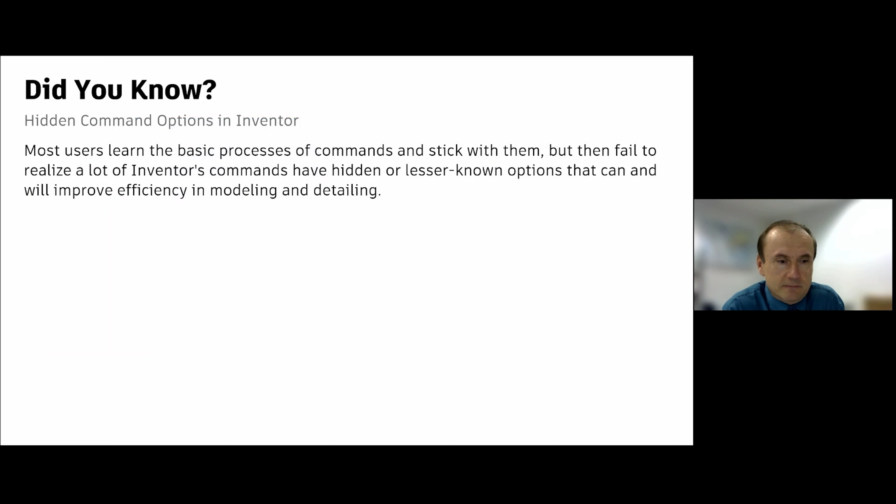So most users learn the basic processes of commands and stick with them. But then they fail to realize that a lot of Inventor's commands have hidden or lesser known options that can and will improve your efficiency in modeling and detailing. While this may seem very basic, and this is an Inventor 101 type class, we hope you'll come away learning something new from this class as well.

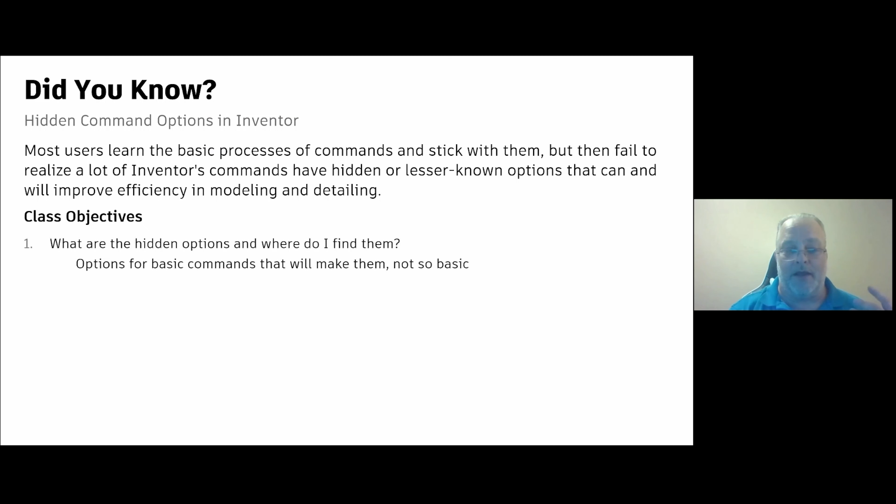So our class objectives today: number one, what are hidden options and where do I find them? Options for basic commands that'll make them, well, not so basic. How to crop a view other than the default rectangular crop. How to put in ordinate dimensions on a crop view or detail view. The user interface, my home options, assembly options, and analyze interference options.

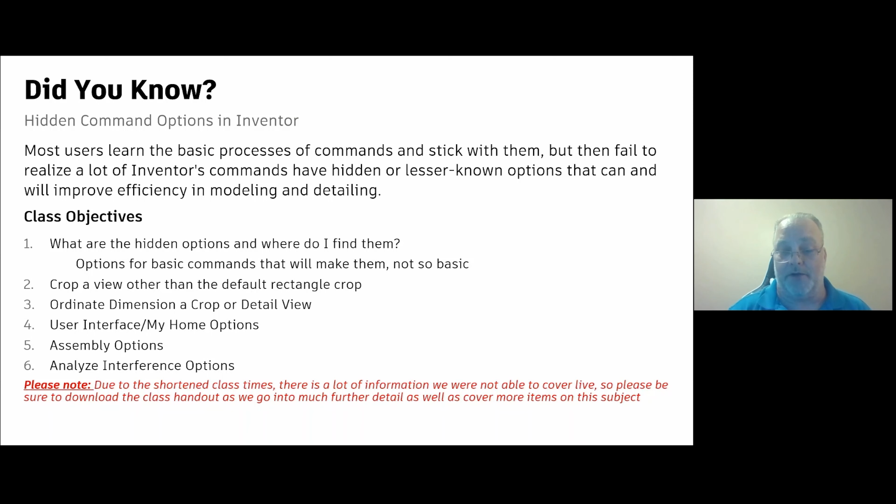So objective one, what are hidden options and where do I find them? Prior to the 2021 release, those on older releases of Inventor, these hidden options are typically found on secondary and tertiary tabs within the pop-up dialog menu. For example, the extrude command looks like this. You got the main menu, and then you got the more tab on there. You'll find some commands that have at least 3 tabs as well.

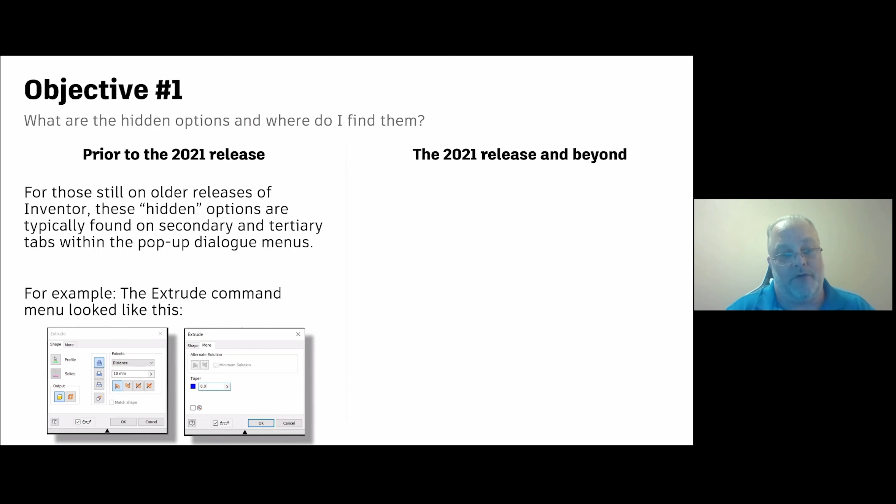Now for the 2021 release and beyond, the extrude command now looks like this. Notice all your options are now up front and visible. There's no more tabs that you have to click, or nothing's hidden. Everything's right there and ready for you to use.

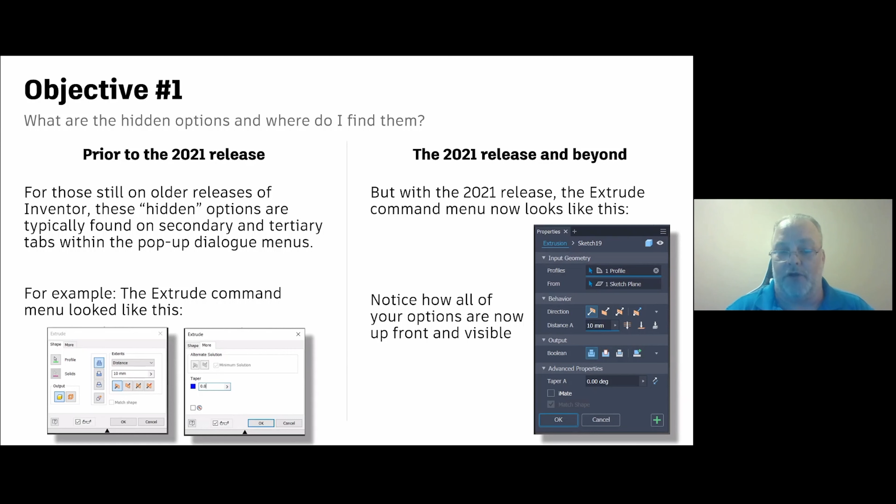So sure, some of you might say, so what? Good point, and I'm glad you think that way. But while these may seem rather obvious, it has been my experience that while users may know the options are there, they still don't tend to use them, either due to not being familiar with them, or knowing what they actually do, or even how to use the options, as well as what I call the comfort factor. Familiarity is comfort - people like to be comfortable, and they tend to stick with what they know. By moving these command options all into the main menu, users should start using these options when needed, as opposed to doing an extra task or a separate command. So the fact is, a lot of users never bother to look beyond that main tab.

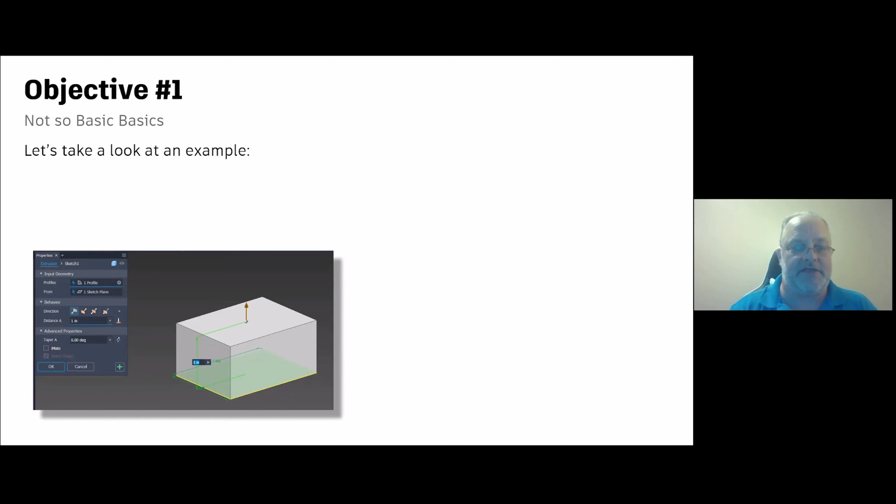So let's look at an example here. So you got the basic extrude command. Now, let's say you needed a draft, okay? You could use the taper option, and you can generate that draft to that operation, avoiding having to add another

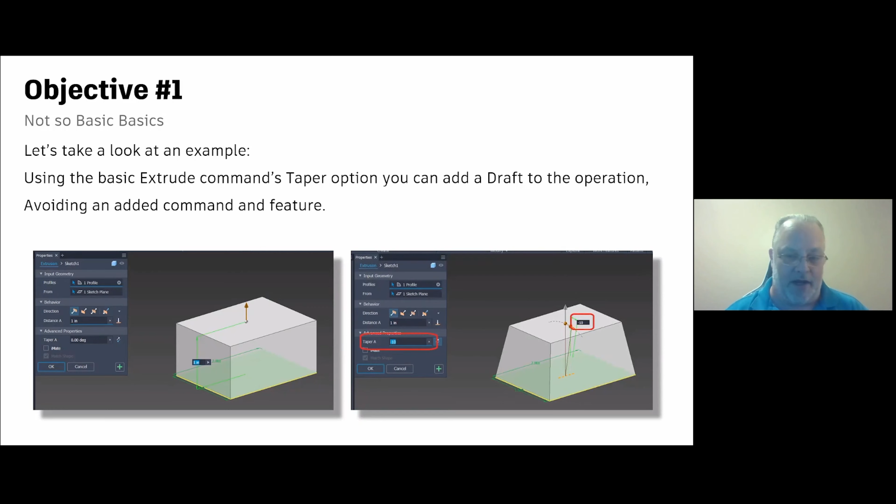command and feature. Now, again, you know your product better than anybody else does, so this may not apply to you in that certain instance, but then again, it could. So knowing the option is there, it's up to you to use it and utilize it to your advantage. So again, as you can see, you can put that taper on there, and that could act as a draft for that particular feature.

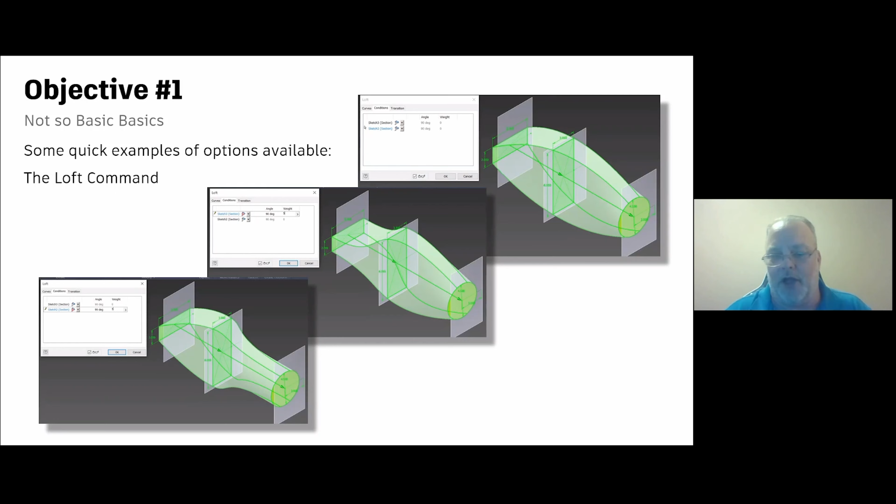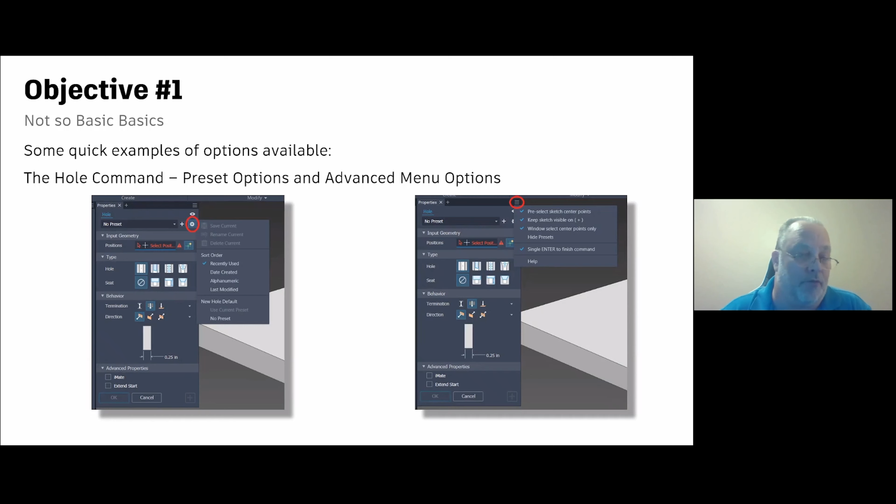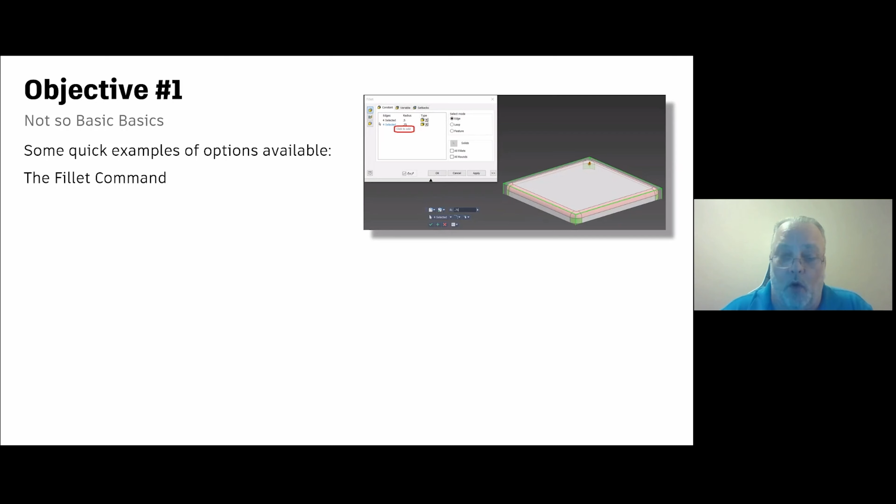The fillet command. Although it's located on the main menu of the fillet command, one of the items that users seem to miss the most is the click to add option, as you see circled here. This allows you to literally insert all required fillets in one command for that entire part.

Okay. The second tab on your fillet is for variable fillets. So it allows you to do just that. One fillet that has variable radiuses, you can put them all into one command. And then the third, you're allowed to adjust the setbacks for each fillet at their intersection.

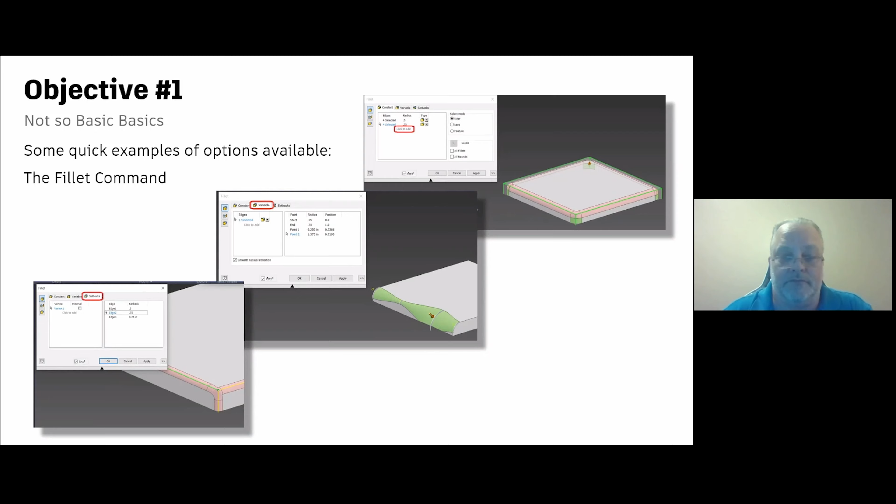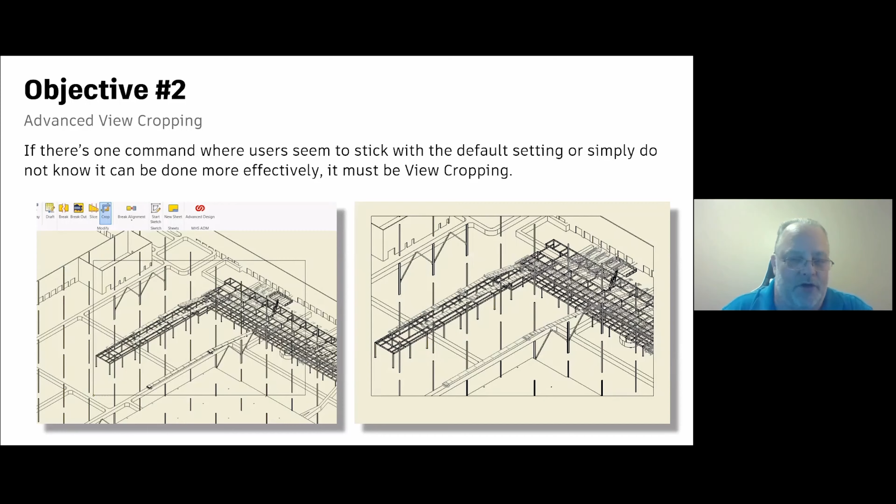Okay, as you can see here, I got an ISO view, and in this first picture, here's your crop window. What if I don't want all this extra info included in here? Okay, unfortunately, using the default, that's all you got to play with. Well, there's a better way of doing it.

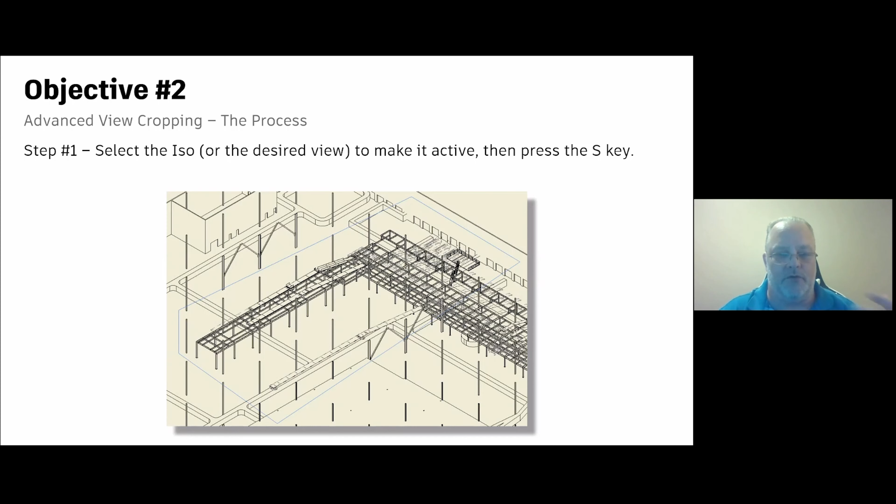So step 1, select the ISO or the desired view, make it active, and then press the S key. That will put you into sketch mode for that view, generating a view-based sketch. Step 2, sketch the desired boundary of the crop, and it needs to be a closed loop, and constrain it to prevent it from shifting during any kind of edits.

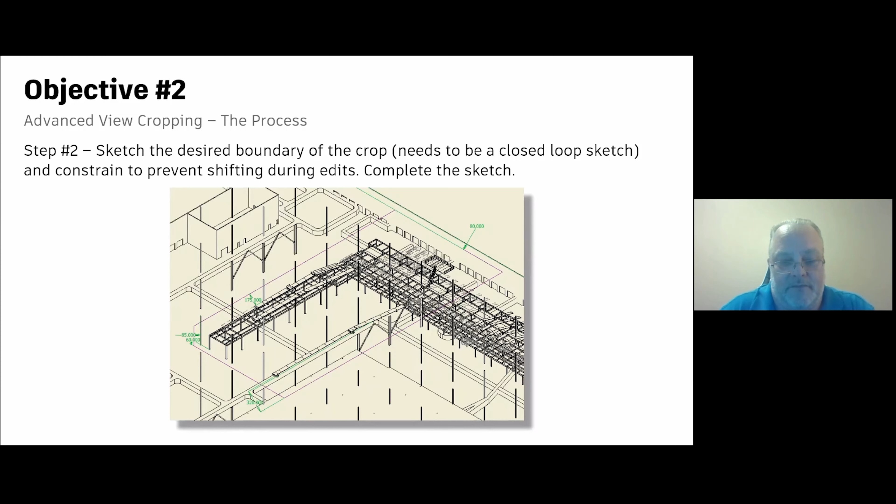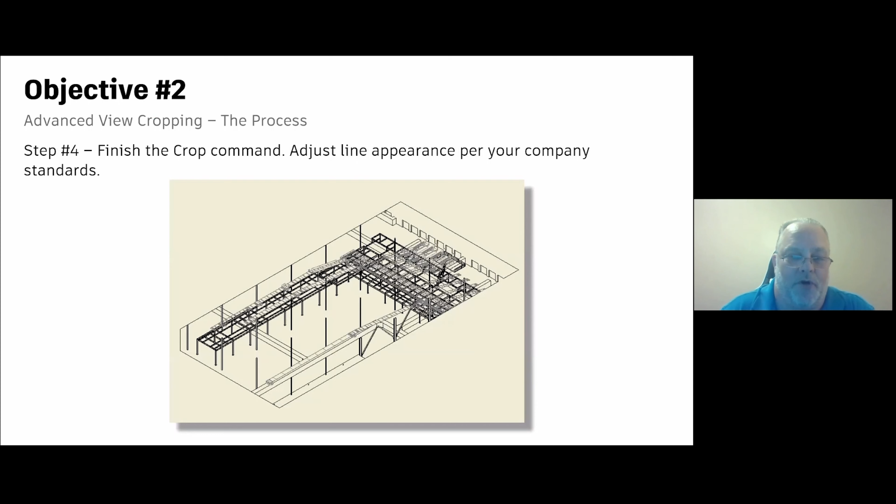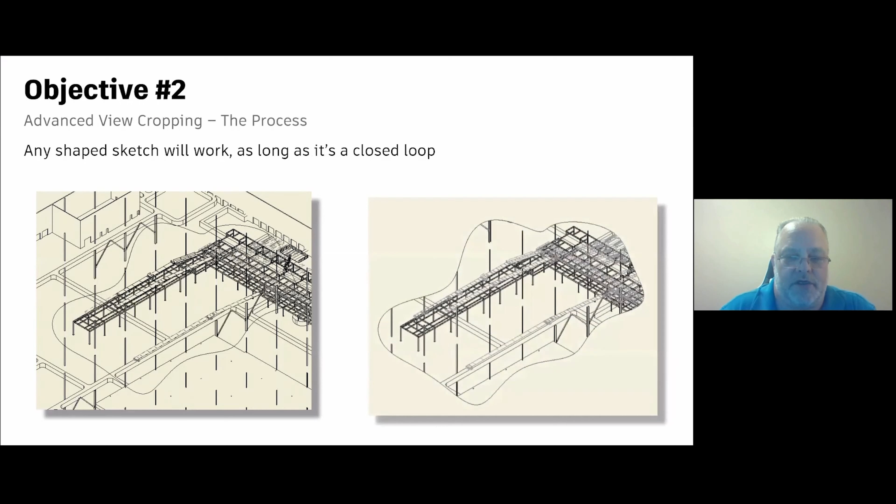This will be shown step by step in the handout. Okay, so this video may go through kind of quick, but we'll definitely have it step by step within the handout. So check that out. So here we have a detailed view we have sectioned off, and we got to dimension this.

So what you want to do is open up the browser until you get to that part, and then right click and select include work features and make visible whatever you're using as your origin. Okay, so here's your origin point. Granted, it's off the drawing in this case.

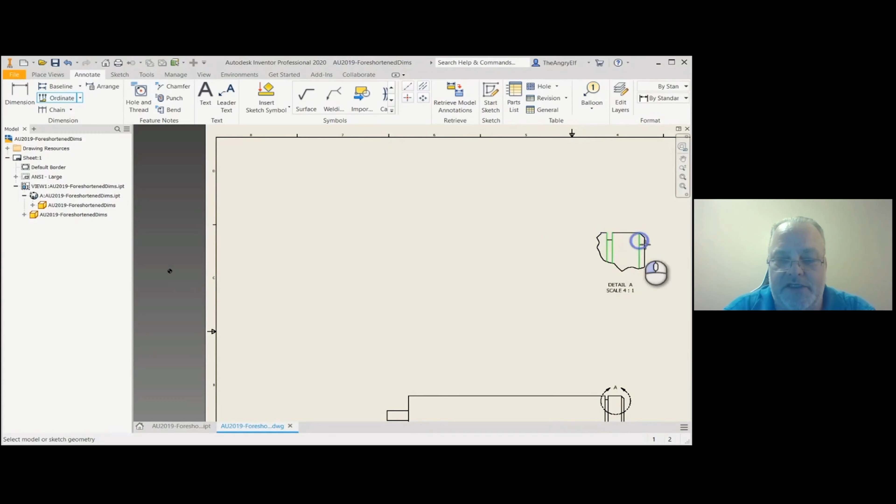Select a view and locate the origin for the ordinate dimension, and then go in and select your lines as you normally do. Continue the command, place your dimensions, finish the command, and now you can come in here and adjust your ordinate dimensions so that they're legible, if they're close to each other.

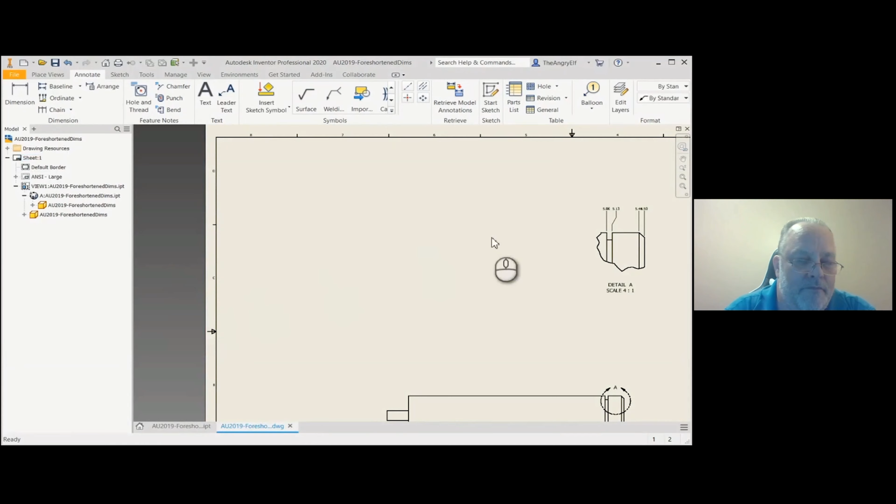And if that origin is on the drawing and you don't want to see it, right click it and deselect the visibility for the point and for the indicator. Pretty nifty. Like I said, this little trick definitely helps. I've seen a lot of people that kind of scratch their head on this.

And under the General tab here in the Tools, Application Options, you can actually have My Home displayed or not. And it's gonna show like 50 documents, the most recent. They're gonna be listed here, maximum 50. You can change that. Okay, so if you want to see it all the time, just click on it, and I am doing it. So if you ask me if I like it, yes, I like that.

Something else about here, you're gonna see the New where you can start any type of Inventor file, and some other information here on the left depending on what you have selected, projects or shortcuts or file details. Okay, and if projects is on here, bluish, then you can see previous projects that you played with or the current one. And then on the right side you have information details about that.

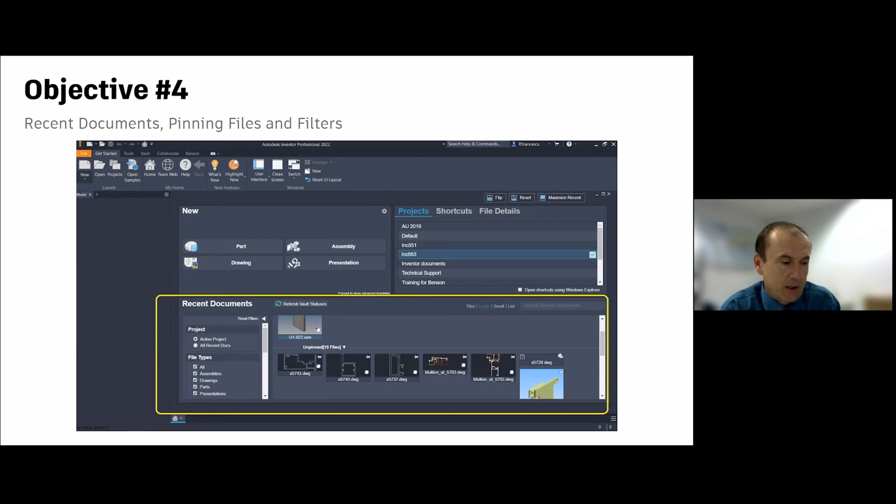Okay, so down here, you're gonna see the recent files. And what I like about that, maybe you know, maybe you don't, you can pin a file. So if you pin, it's going to be always there. If you unpin, if you have other files, it's going to go to the end. But if it's really important, like for me, this assembly is very important, I would like to pin it so I will always see it there. It's right here. And also you can drag this down and you can see more options depending on what you would like to see.

Next, very important here on the left, I don't know if you ever knew about it, but you can actually sort files. You can sort by recently opened, that's the default, or by the name or by the location. Okay, I like the default one. And also when it was modified, like last day, or I want to see the files I worked on last month. By default, again, is all dates, the most recent ones.

And what type of file would you like to see? Again, assemblies, drawings. If you have a Vault project, you might get more options here. So this is actually very important. Pinned, you can pin it so you see it all the time. And what do you want to see? Active project or even all recent documents. If you switch projects like I am doing, you can see here I have several projects that I work on almost daily. Maybe I want to do all recent documents.

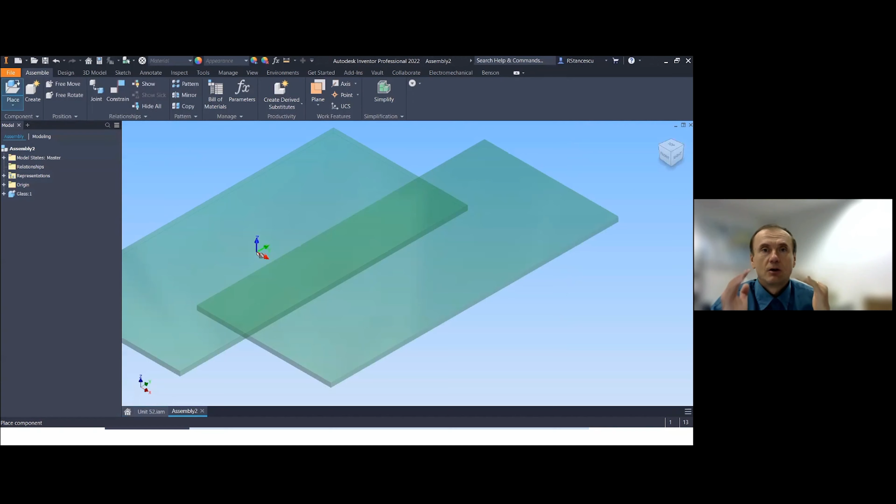This too: display component names after relationships, and place and ground first component. This is actually pretty good, because when you start a new assembly, let's say using the shortcut, and place a part, it will always match the origin of the part with the origin of the assembly, which is very, very nice. You don't need to add any constraints or anything.

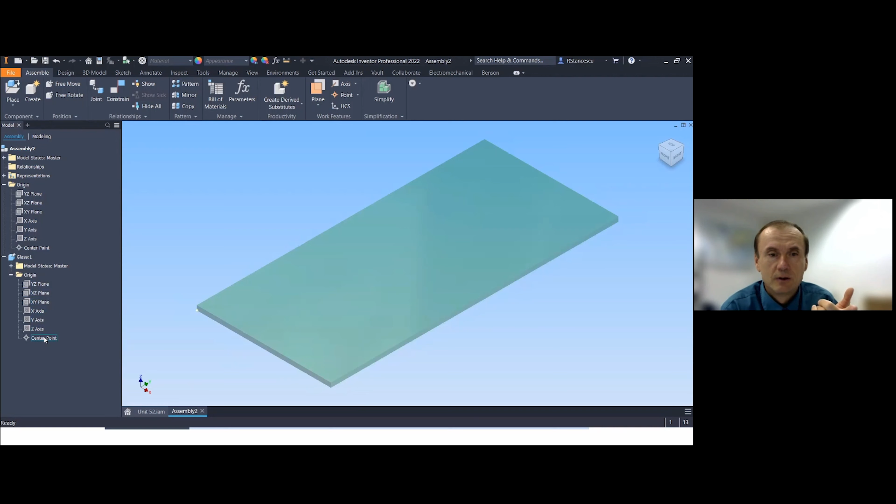So you can see here in the browser the YZ on the left, the XZ there, the x-axis, and of course the origin is on the bottom left, and it's not moving. I mean, it's pinned in the origin. So that's very important. I suggest to do that. And the other setting, let me go back to the assembly. It's place and ground. We saw that, display component names after relationships.

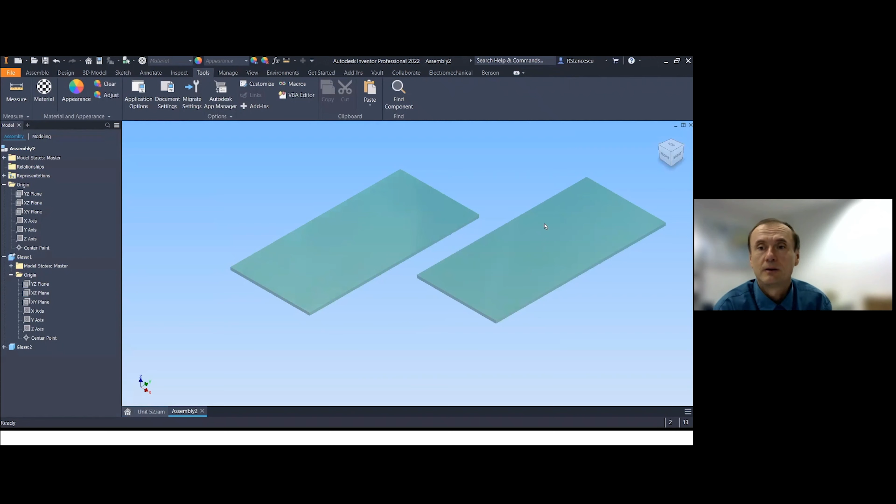So if I add another one, and you know how to add something else, like Control C, we all do it everywhere in emails, in documents, right? Control V, just paste another one. And I want to add a constraint. And again, instead of going there, you can see it's C. So you can always press C and get the command. And I want to add a constraint between this and that. It's a very easy, very basic constraint.

As you see here in the browser, both files are actually listed. And then under the mate, they're both listed. That's because of the setting. And if I go back there, just to see what's happening if you don't have it, hit apply, it disappears. So you see mate one, but you don't have a clue what mate one is, between what components, okay? So I really like that to be selected here, and it's going to display in the Inventor browser.

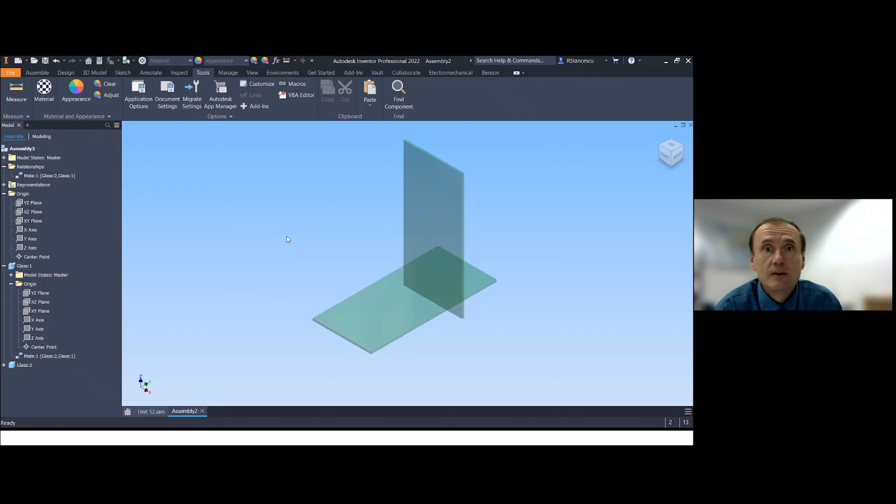Okay. So that was a good trick. I like that. It's very easy, but you have to know about that, like many other things in life. So let's move to the next one.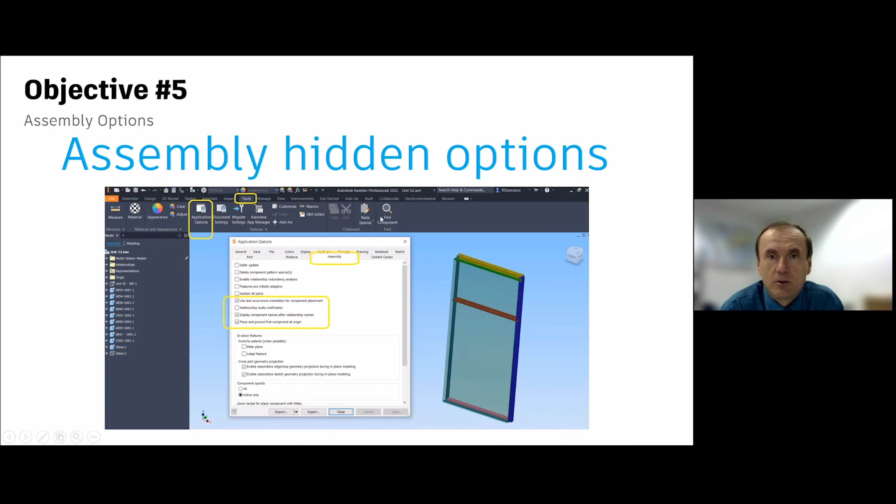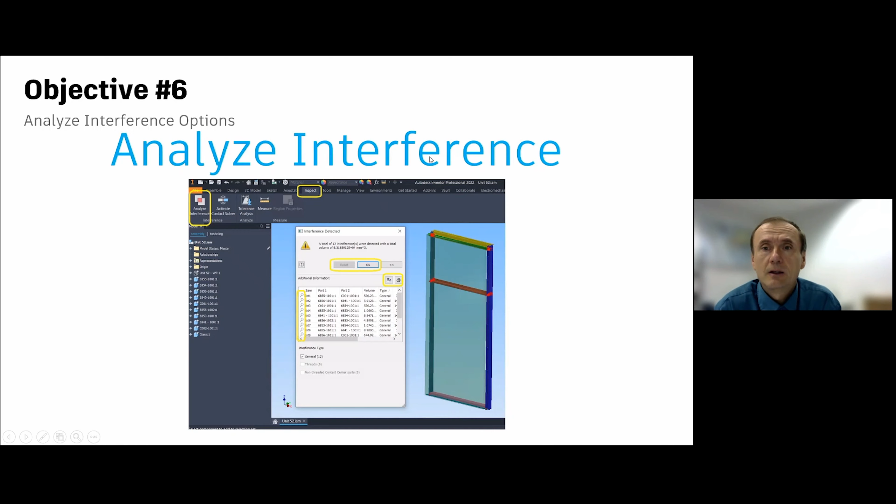That's my PowerPoint. We talked about objective number 5. Let's go to number 6. So number 6 is about analyzing interference. Maybe you guys use it, maybe you don't. We're talking about Inventor. It's 3D, so interference is very important. That's why you move from 2D, right? So in any assembly, you can see if there are components sharing the same volume.

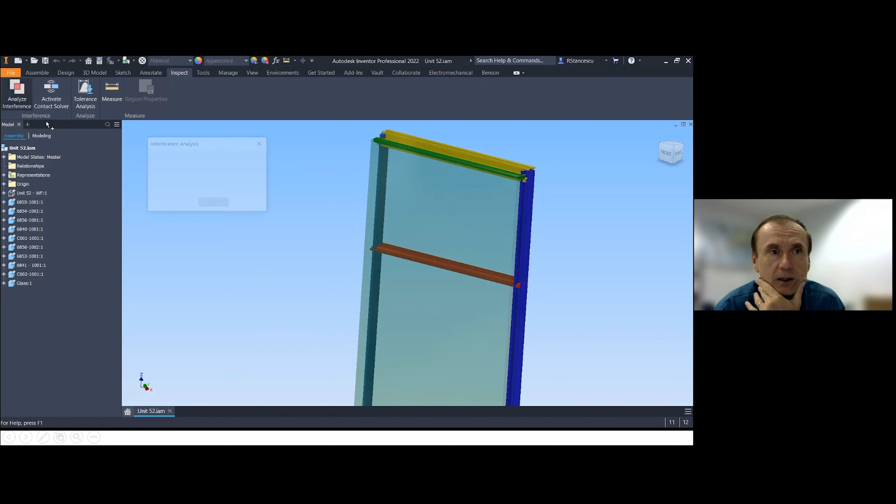I am sharing my Inventor, and I can close that file. I don't need it anymore. And I have an assembly here. So how to see if I have interference between parts here? And that's actually a real model from my work. I didn't create this just for this session. So it's under Inspect, Analyze Interference. Define set 1. You can actually select all together, that's the easiest way, and hit OK.

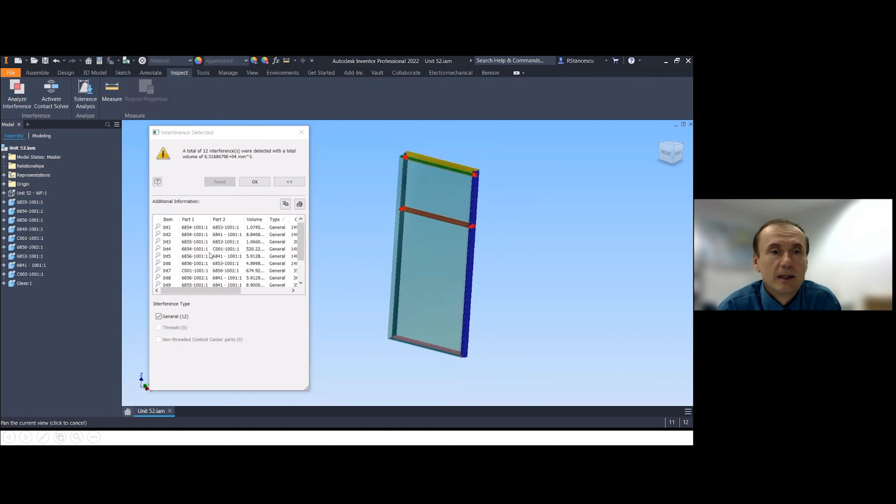And that's very interesting. I have 12 interferences. Okay? You can see all 12, and you can see them highlighted on the screen. I can zoom in with my mouse. You can double click on an interference, and it's gonna zoom in, and it selects in the Inventor browser here. You see them selected. I double click here, it's gonna zoom in here. But what I like to do, instead of double clicking, is go to, that's from Inventor, a pretty basic icon, and it's gonna do that.

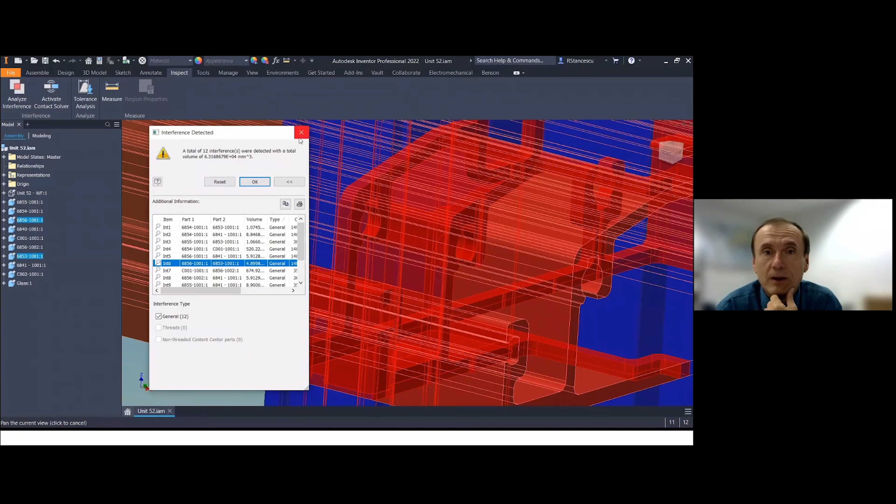Reset. I don't know if you guys know or not. Sometimes I've seen people just close it and start it again. Reset brings it back kind of to the home, right? So reset is very good. What else have I got here?

You can ignore some of them. If some of them just don't make sense to you, you can right click and ignore. And you see, I had 12. Now I have 11. Let's say I don't want that guy, I can ignore that. So now I have only 10. Why would I do that? Because then I can copy the ones that I'm interested in. How do I get them back? Of course, what people do is just close the dialog box. But we're gonna right click and unignore all, and they're all 12.

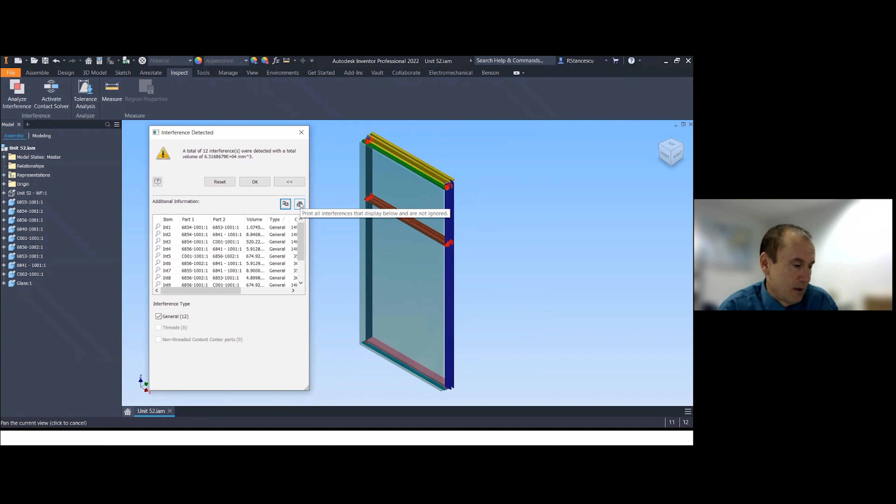So I want to copy them. You can just copy them, and they're placed in the memory, and then you can just go anywhere and paste them. I have my Outlook closed, but it's gonna paste them anywhere. Or just print them. And of course, I'm not gonna print them on paper. You can go to PDF. So you can save all that information in a PDF. So that's actually pretty nice. And that's about this 6th objective.

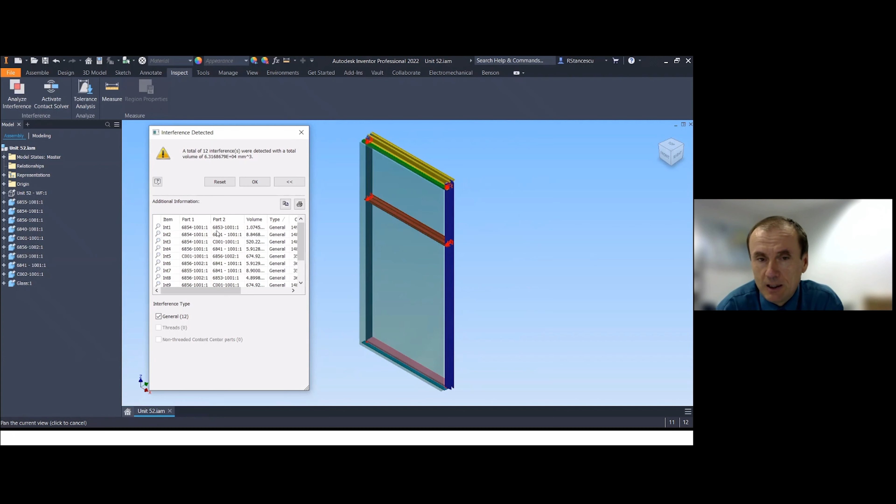And again, this was objective number 6 about interference, and that's a good characteristic. It's something very good for 3D. And this is my last objective.